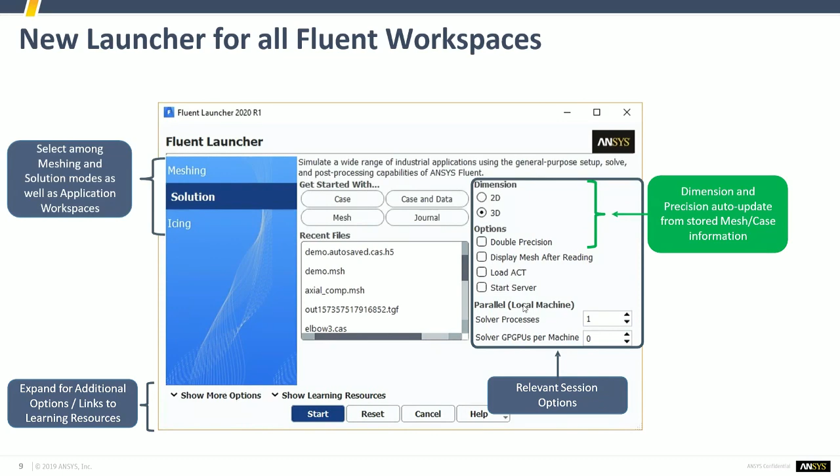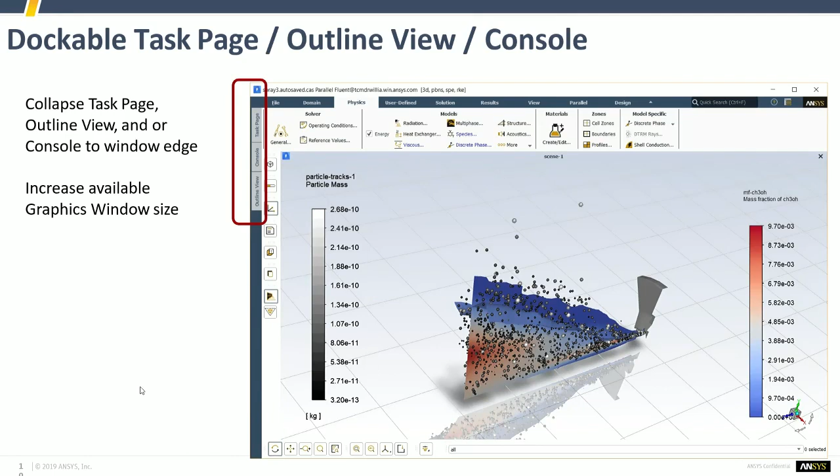The second, probably noticeable and very obvious change is that now the task page, outline view and consoles are dockable. You can collapse them to give the graphics window more space. If you want to visually investigate your problem, or present it, it's basically a bigger graphics window for you to work with, and that gives more advantage to users when they're presenting or looking into models or results.

There are a few new rendering effects. There's reflection, shadows, a ground plane added, and other effects. First of all, it gives the software a new, fresh look, and if you're presenting a result, it's probably more impressive. But you have control over these. If you go to the preferences dialog box and then graphics, you'll notice different options where you can uncheck the reflection, the shadows, and everything. So you have full control over that.

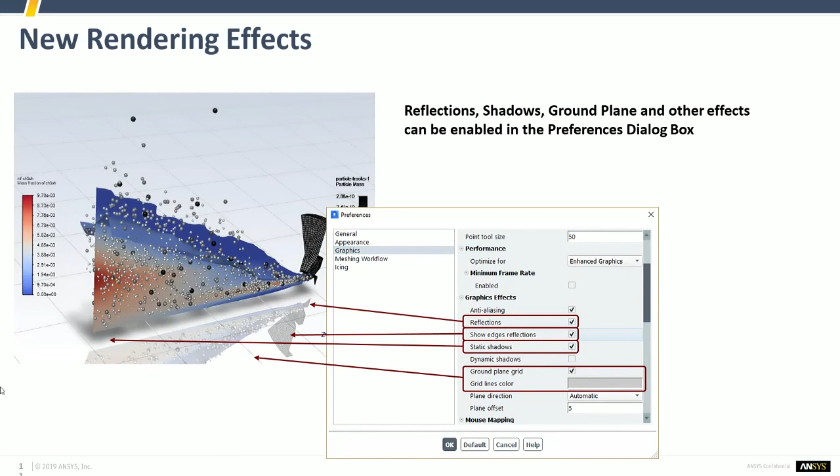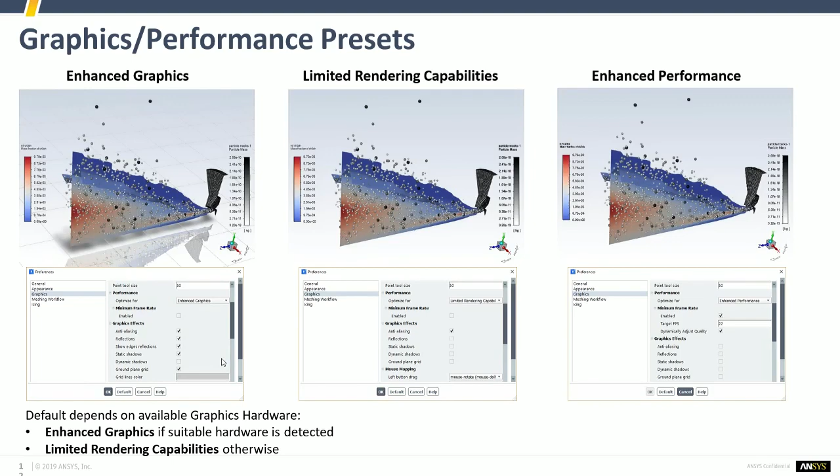Besides that manual control, the software in a smart way detects your available graphics hardware. If you have enough graphics hardware, it will by default switch to enhanced graphics, which includes all those rendering effects I mentioned. If there's not enough graphics hardware available, it will switch to more limited rendering capabilities, or enhanced performance, which limits those new rendering effects so as not to slow down your machine.

There are a few improvements and enhancements in the meshing workflows. For those of you not familiar with the Fluent workflows, they started in late 2018, but the main development was in 2019 when ANSYS introduced meshing workflows. Before, the Fluent meshing task was not necessarily easy. It needed the user to navigate through different windows and have a decent amount of knowledge about the Fluent mesher. So ANSYS introduced these workflows that, without the users necessarily having that knowledge, guide them step by step through the Fluent mesher and help them get decent results.

At each step of these workflows, the software suggests just the meaningful and relevant options to the user, so minimum distraction, and it's really easy to go from top to bottom of these workflows. So I would suggest you try these if you want to use the Fluent mesher. It's really easy to use now. And in 2020 R1, there are some updates and enhancements.

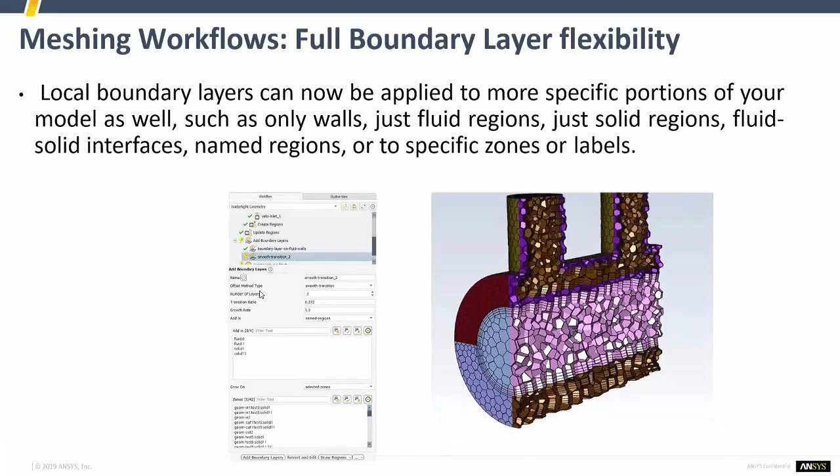And some specific enhancements to the Watertight workflow. Now it handles non-symmetric periodicity, and it stores the location of zones for persistent meshing. If you're a Linux user, there was a bottleneck before, because SpaceClaim right now is not accessible or compatible with Linux, so Linux users had problems importing the SCDM, which is the SpaceClaim format files, into the workflows. Now you can export a PMDB, which is Part Management Database, from SpaceClaim, that is basically used as a workaround for that problem.

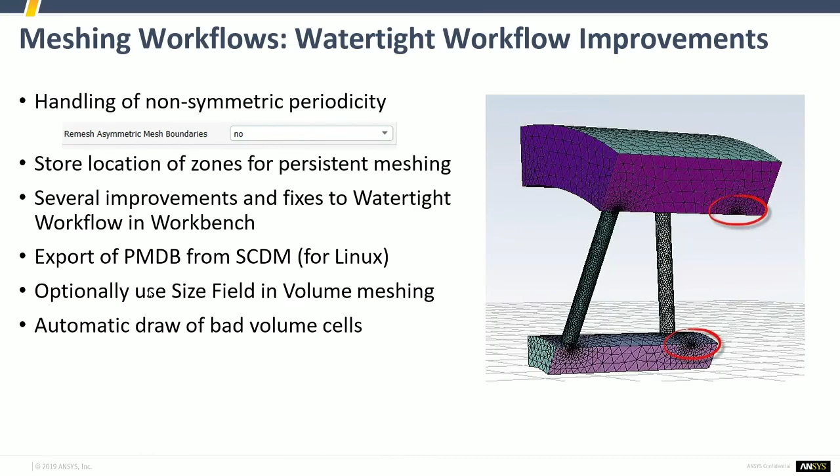You can optionally use a size field in your volume meshing, if you're familiar with that concept, and there's an automatic draw of bad volume cells now in the Watertight meshing workflow. In the other workflow that I mentioned, Fault-Tolerant, which is basically the dirty geometry workflow, there's an enhancement. There's a task introduced to update the boundaries, similar to the Watertight geometry.

And now, in the local refinement region task, there is an offset box that you can create, scaled or offset based on the bounding boxes that you have. These are very useful techniques if you have, for example, external fluid dynamics with vortex shedding, and you want to have different refinement regions to capture those effects.

And also now you can identify the deviated faces, and there's a task for that. Before, if you've used Watertight or Fault-Tolerant meshing with the wrapping technology, you know that the generated mesh might deviate from the actual geometry. Before, you needed to be in the solver environment, not the mesher, the Fluent solver, to check those deviations. Now it's in the meshing environment, so you can check how accurate your mesh is in terms of being on top of your CAD geometry.

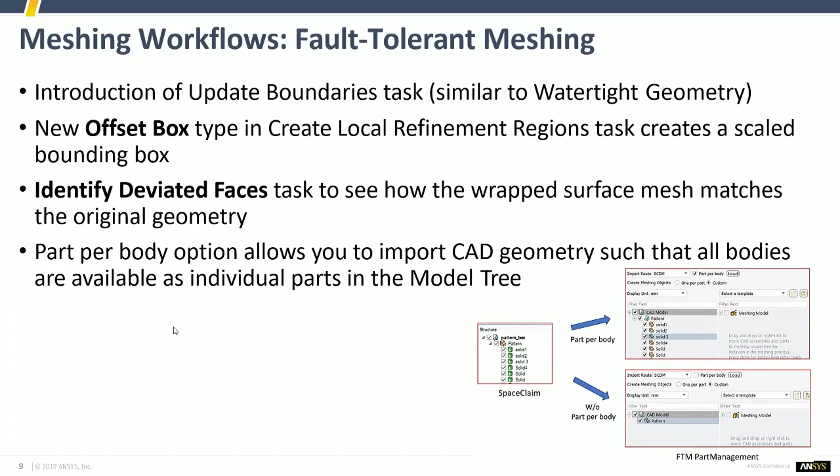Now let's talk about some setup enhancements in 2020 R1. This is very useful. If you've used ANSYS Discovery Live or AIM, it's something that is available there for simpler tools, and now it's available in Fluent. The idea is that you can click on different zones in the graphics window, and there's a quick menu that appears with the most common boundary conditions. So it's really easy to do a quick setup for those boundary conditions, like velocity inlet.

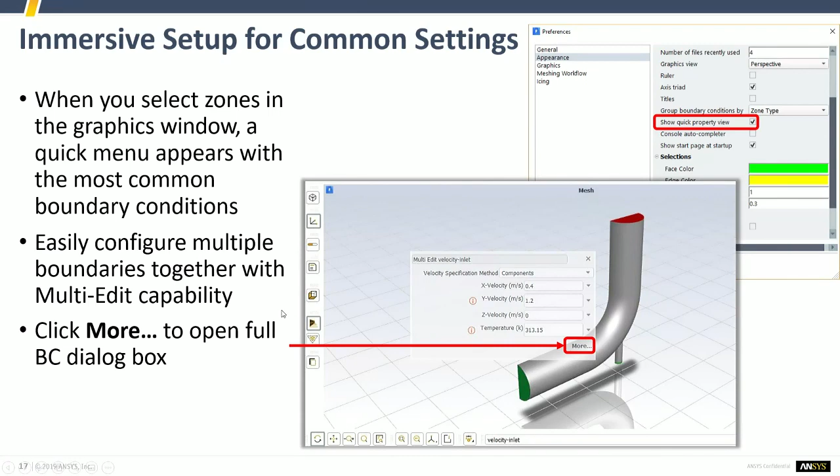Multiple boundary conditions you can set up together. If you click on More, it opens the boundary condition dialog box, as used to be the case before, which users are more familiar with.

There's also an enhancement in the multi-edit boundary or cell zone dialog box. If you remember, in 2019 R3 this was first introduced by ANSYS. You can select different zones from the zone list, and then change their properties altogether, or copy the properties from the master zone and apply them to the rest of the zones you've selected.

There were some bottlenecks before. In 2019 R3, as you can see in the image, if you selected multiple zones, the first zone by order, the top of the list, was considered the master zone, and you were only able to see the properties of that zone or copy those properties to the rest of the list. Now, in 2020 R1, there's a drop-down menu added where you can define what your master zone is.

And this way, you can basically change the master zone. And the second advantage is that you can see the properties of all the items that are selected zones in your list. So it's more control over the multi-edit option that was previously introduced.

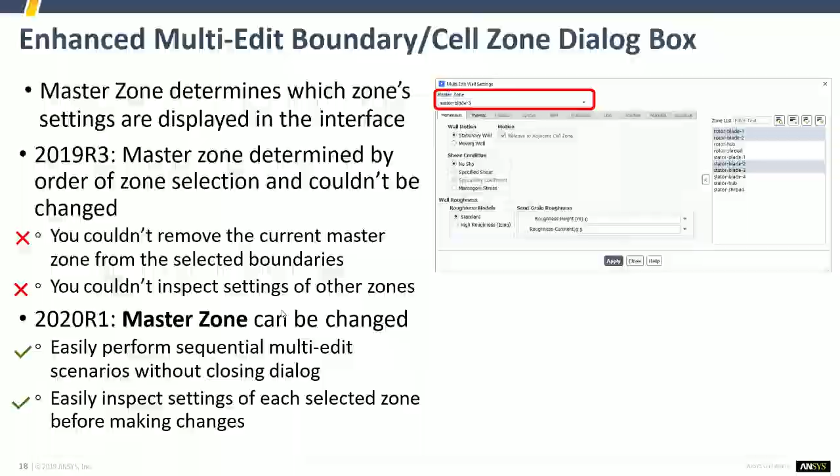In the physics modeling, also there's some enhancement. Probably one of the biggest ones is the turbulence update. If you remember, before in Fluent, the default was a laminar flow in terms of the turbulence model or option. By default it was laminar. Now it's switched to by default the model is K omega SST, and there are two reasons behind it.

One, 99% of the CFD simulations are not laminar. Basically, the actual fluid dynamic problem that you're trying to solve is not laminar. And the second reason is that ANSYS wants users to switch or migrate slowly from K epsilon, which was probably the most common or most preferred option before among the users, to the K omega SST because it's more accurate and more capable in many cases, including the separation.

There are some cases where K epsilon still might be a better option, or few cases I would say. So in general, K omega SST is a better option. And there are some cases that K epsilon might be more stable. There are some ways to basically switch back or use K epsilon in those cases. But it is safe to say that K omega SST is a good option to be a default for the turbulence model.

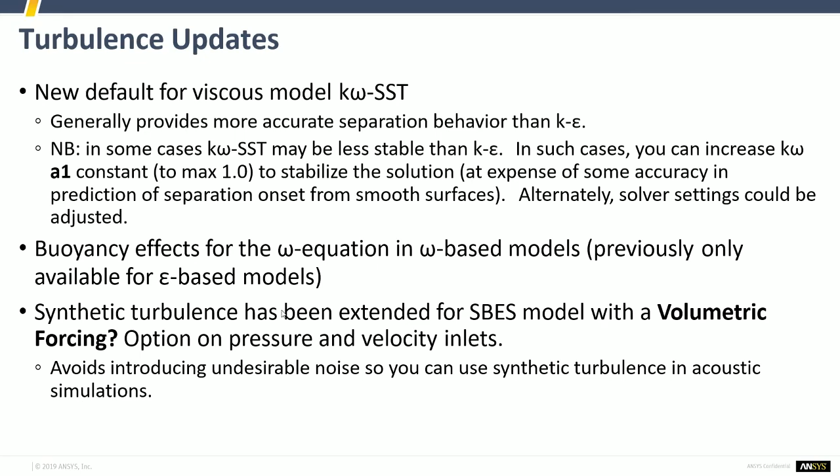Also, the buoyancy effects, which were previously only available in epsilon-based models, are now available in the omega-based models. And synthetic turbulence has been extended for the SBES model with volumetric forcing. The problem before was that if you had acoustic simulations, this synthetic turbulence formulation was applied to the faces, which used to cause some problems, and now they have a volumetric formulation, basically not to generate those issues with acoustic simulations.

In the Eulerian multiphase, there is a workflow consolidation. So before, if you remember, if you had a multiphase problem, you had to set up the whole required inputs in three different dialog boxes and windows. First, at a top level, you had to select from the multiphase model that it's an Eulerian multiphase problem. And then in the phases dialog box, you needed to define the phases, and then the phase interaction needed to be set up in a different window. Interaction means the momentum, mass, and heat exchange.

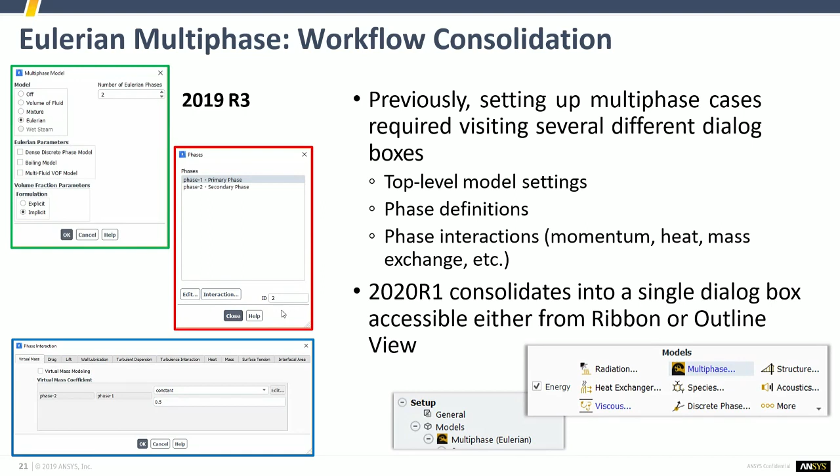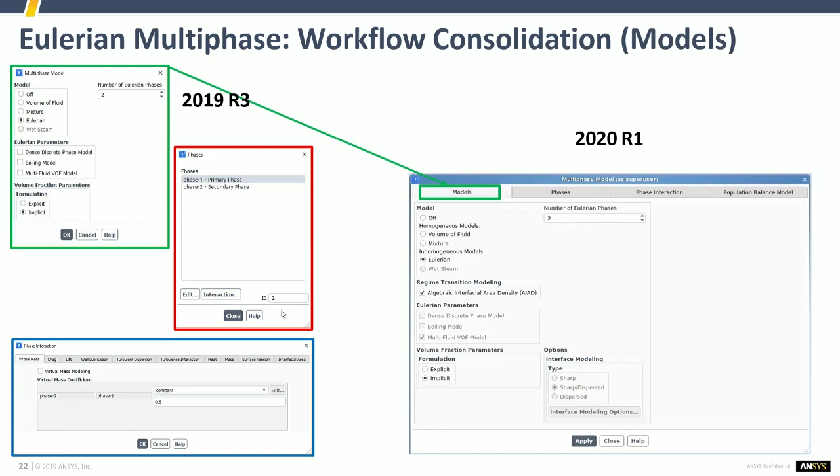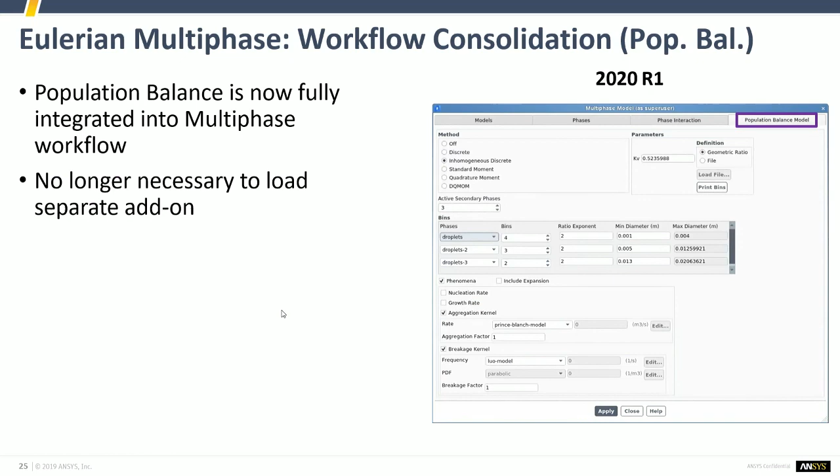Now everything is consolidated in one dialog box in 2020 R1. You can open that dialog box from the ribbon or the outline view, and each of those dialog boxes are now presented in different tabs. You have the model tab, phase tab, and phase interaction tab, and population balance also is now fully integrated in the multiphase workflow, basically if you want to divide them into distinct groups and monitor their behavior.

Volume of fluid, or VOF, has got some enhancement, and this is really a feature I like. Now, if you want to do some mesh adaptation, there are some predefined mesh adaptation controls for volume of fluid and volume of fluid to DPM that automatically set those registers and apply them to the different regions of the domain.

Depending on what you select, if you just select volume of fluid, then those refining and coarsening criteria would be based on just the volume fraction gradients. If you select VOF to DPM generic, it would be just the proximity of the interface. And a more advanced one would be both the proximity of the interface and the cell size threshold inside the secondary phase. If you think of a breakup problem, for example, how big are those droplets and how you want to refine the mesh around those. So it's going to save you a lot of time if you take advantage of these mesh adaptations.

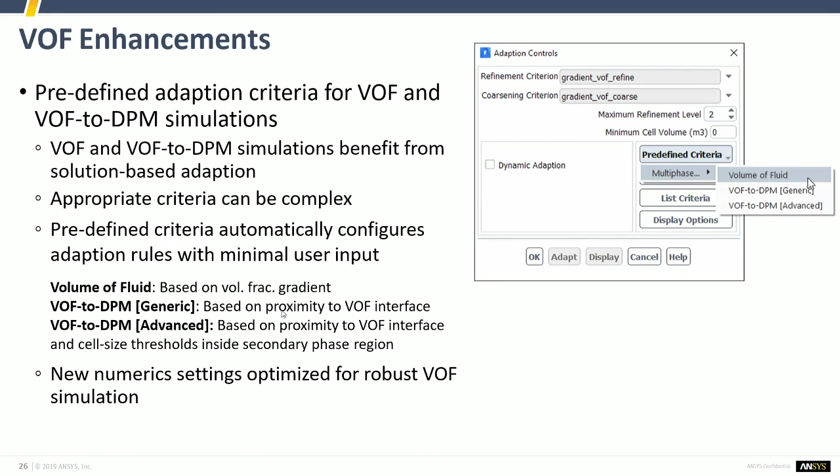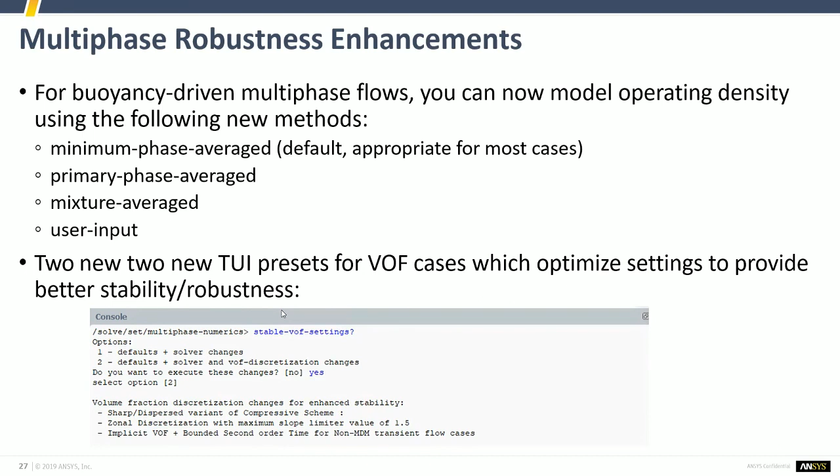Here are some multiphase robustness enhancements. For buoyancy-driven multiphase, now you can model the operating density using new options. Before there was only one option, which was the minimum density of the phases. Now you have that option as default, but you can have primary phase or a mixture average. And also there are two new text commands to preset the volume of fluid cases to optimize the settings for better stability and robustness.

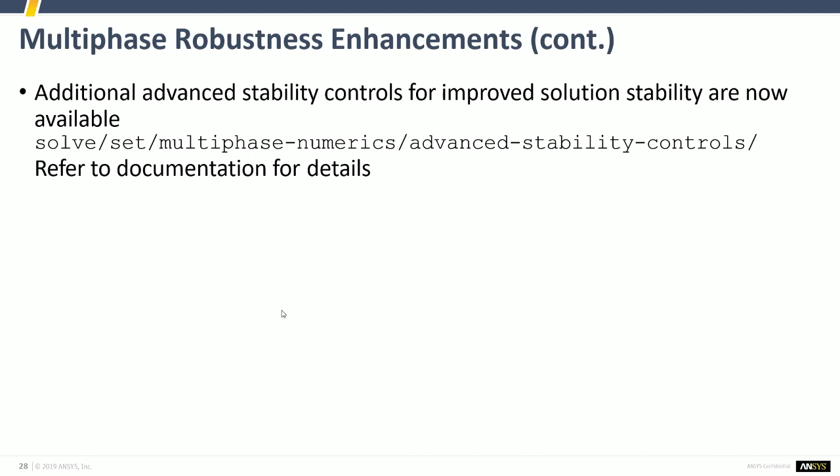And there's another command that you can use for more stability for multi-phase problems, and there's documentation for that in the new release notes.

In the DPM, there's a high resolution tracking method, which is an alternative particle tracking approach for cases where you have small particles, for example, with low relaxation time. This method decomposes the cells into their tet components. They're called subtets, and then it tracks the particles through those subtets, knowing how those subtets are connected to each other, and does continuous interpolation among those subtets.

So it makes it more efficient to track particles in this way, more accurate, and it's compatible with most DPM capabilities. There are some exceptions, like overset mesh is not supported with this method yet.

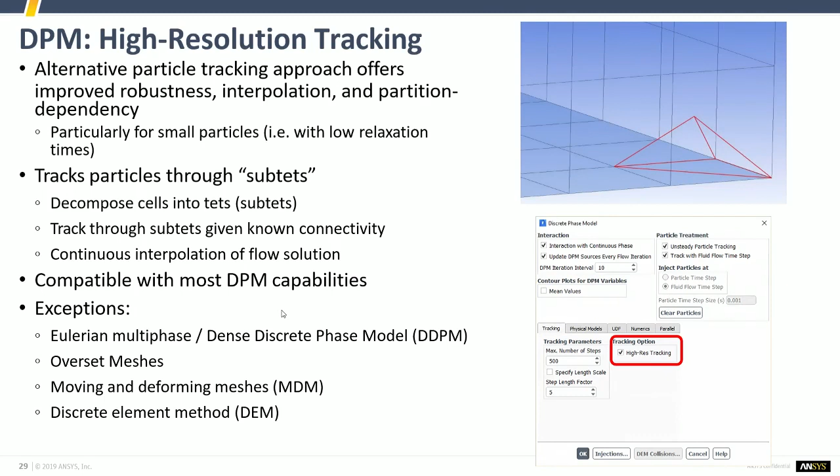And if you have a breakup problem and you're using the Madabhushi breakup model, there are some extensions to that. There's a new column for the drag coefficient parameter, which by default is 1.48, and you can have your UDF function as the drag law, which is something that many advanced users have asked for a long time.

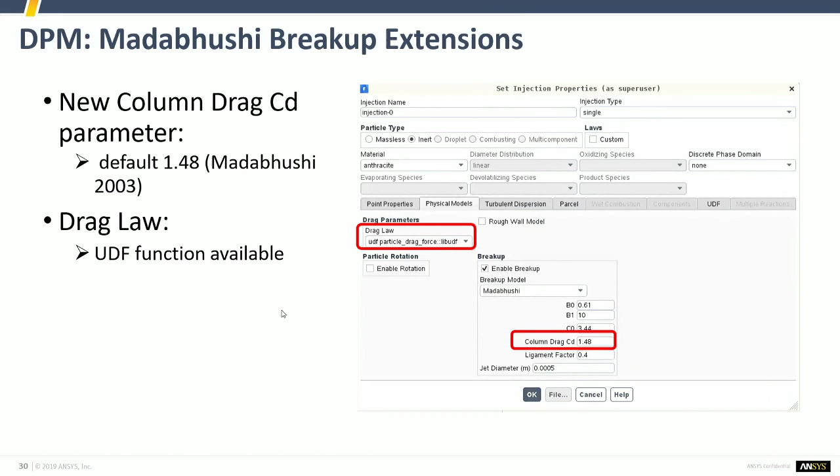If you have Lagrangian wall film, basically representing the wall film with particles, there are some enhancements. You can now initialize the wall film. So in your wall zone settings, as you can see on the right-hand side of the screen, there's a DPM tab associated with that wall. If you check initialize wall film, there are some options to use as your initialization input.

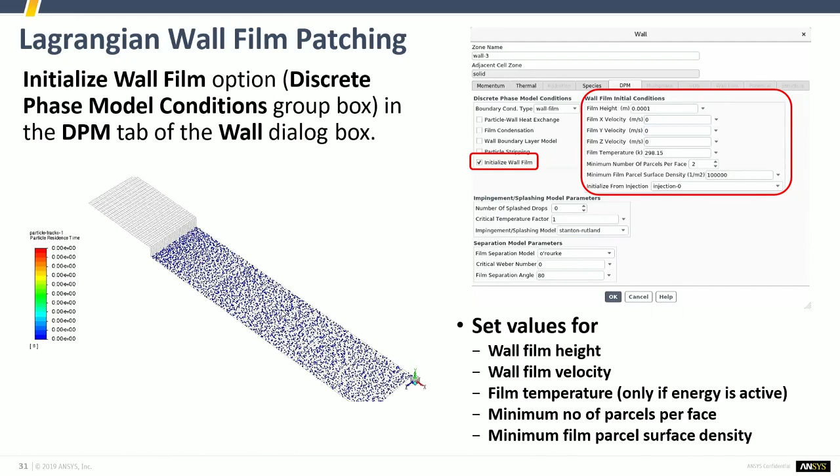It can be a wall film height, wall film velocity, film temperature, minimum number of parcels per face, and minimum film parcel surface density. Minimum number of parcels per face is a very good option if you have a very non-uniform mesh. It will help you distribute the particles representing the wall film.

You can initialize from injection, so it's used to assign injection materials to corresponding physical properties of the film. In addition, you can reset this Lagrangian wall film to 0 from the solution initialization task just by clicking on the reset button. This will delete all the Lagrangian wall film particles as well as zero out the corresponding variables without affecting the free stream particles. So it just affects the particles associated with the wall film, not the whole domain.

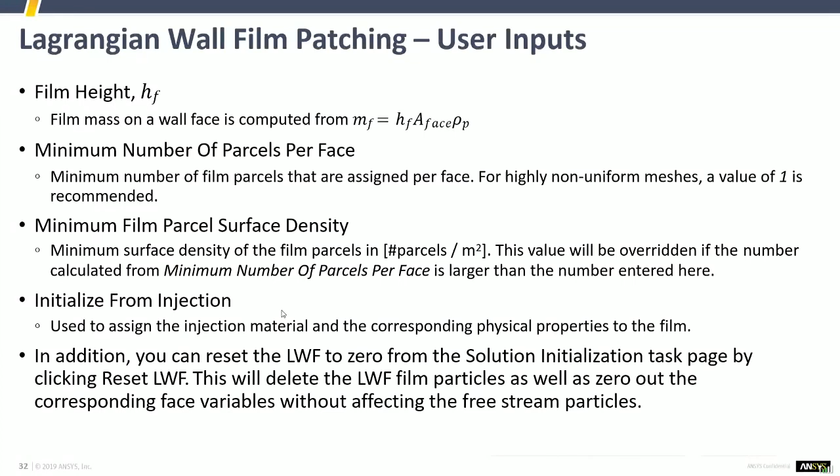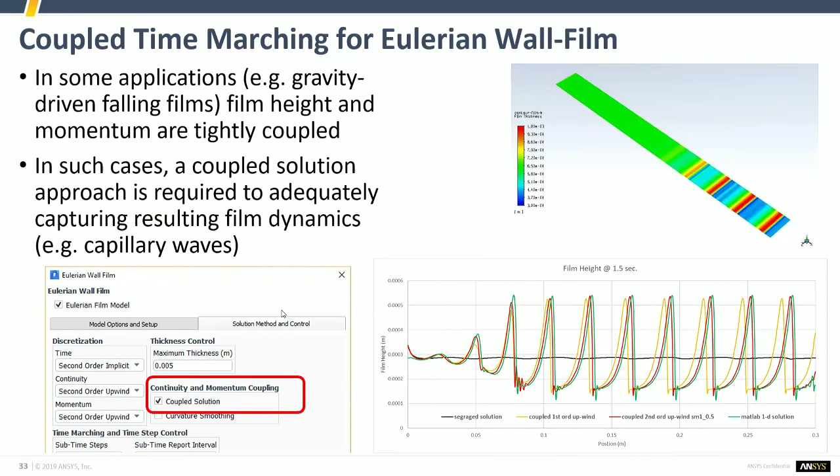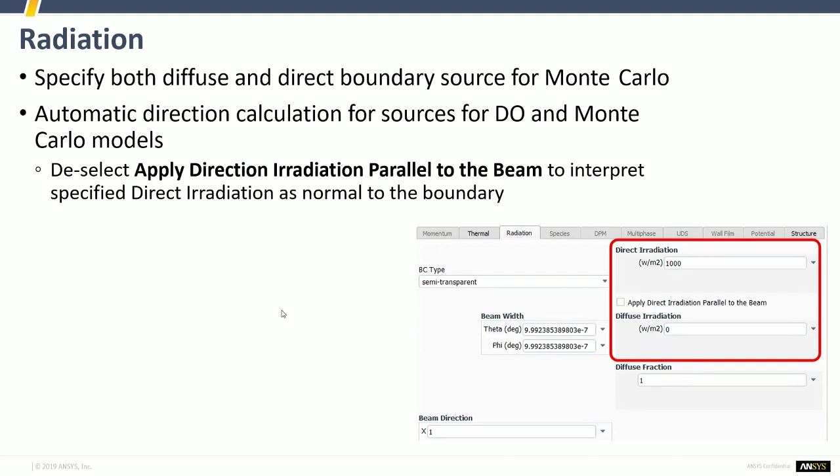Radiation has got some improvements, specifically with Monte Carlo you can now specify both the diffuse and direct boundary source. Before, if you had an irradiation, those values were parallel to the beam. If you had the component normal to the surface, the user had to back calculate the parallel-to-the-beam value, and now it can be done automatically by the software.

In far field acoustics, there's a new Kirchhoff integral for the acoustic wave equation solver, which enables users to use any closed surface as an integral surface. Before it was a bottleneck because those integral surfaces needed to be only zone surfaces. Now it can be any closed surface using this new integral method.

There are some restrictions. Probably the most important one is that this is only an on-the-fly computation, meaning that you cannot save the data and post-process these acoustic properties later. So it's an on-the-fly calculation.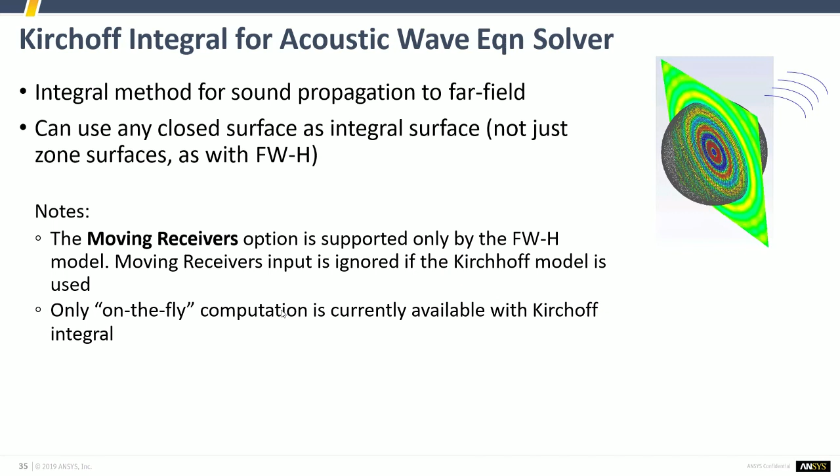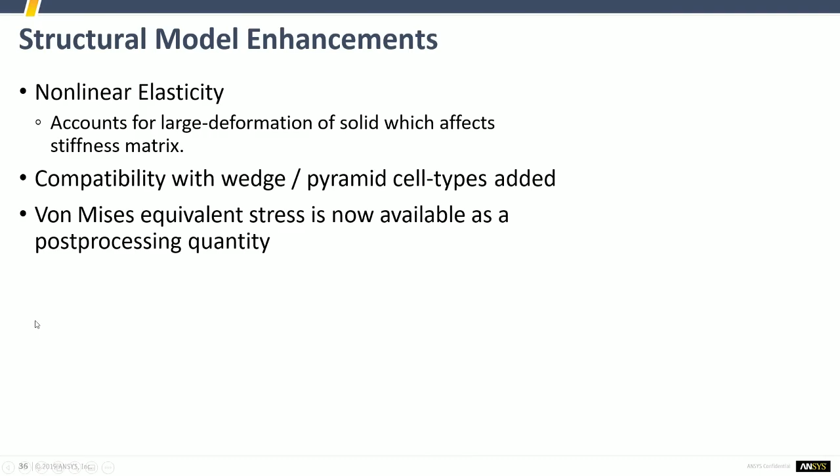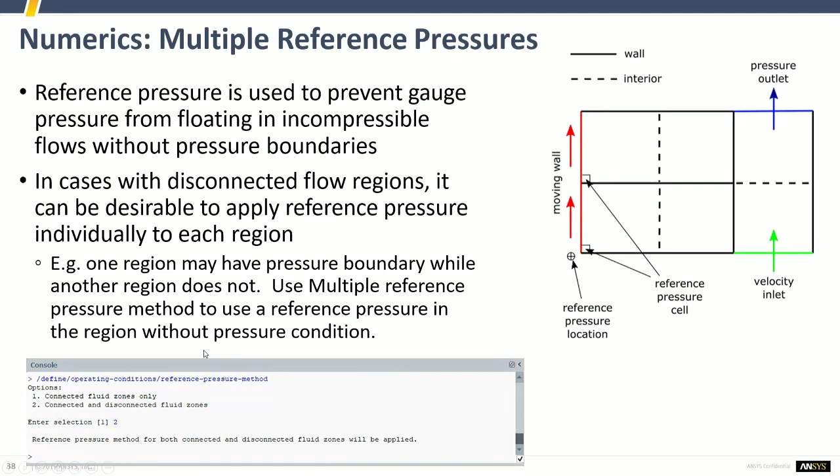Now you can specify reference pressure for those two regions that are bounded with the walls. And the one that has the pressure outlet, as I mentioned, doesn't need any reference pressure because it's going to be overridden by the pressure outlet. But this is a good improvement that you can now have different values for different regions.

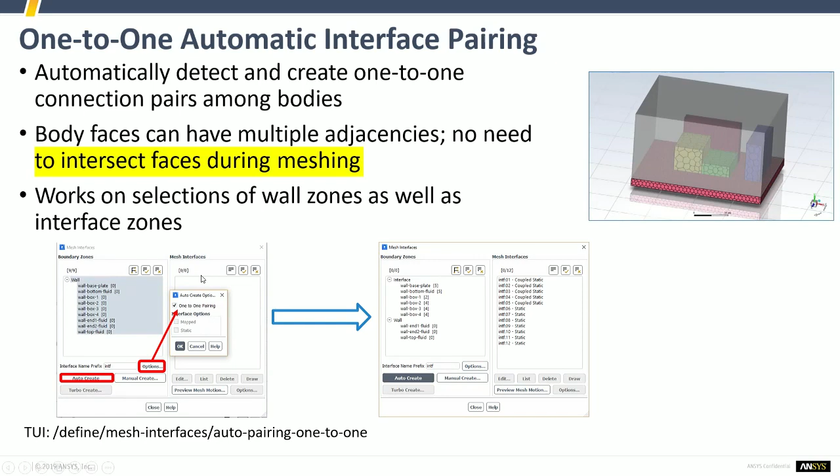So in the boundary zone dialog box, if you click on auto create, and in the options check the 1-to-1 pairing, and then hit auto create, it will create all these boundary zones shown at the bottom of the screen. So it's very easy to detect and define different interfaces.

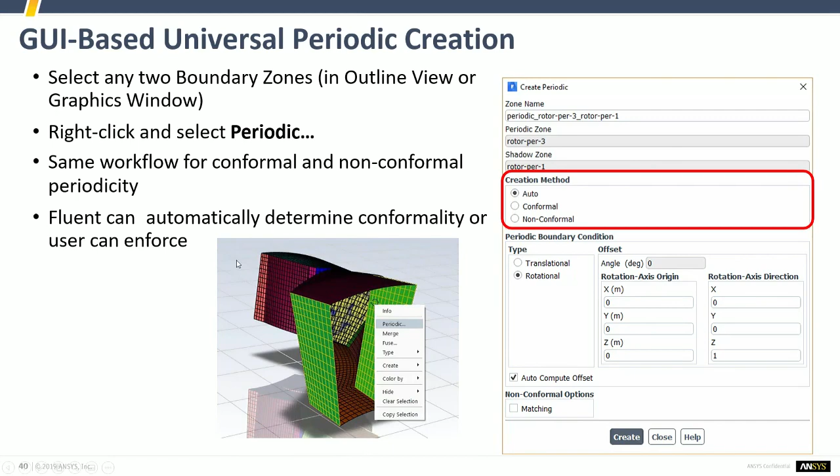There's a GUI-based universal periodic creation. Now you can select any two boundary zones, right-click and say periodic. And it can be conformal or non-conformal. The point is that if you select the auto option, the software would detect in a smart way if they're conformal or non-conformal, and then apply the periodicity boundary condition.

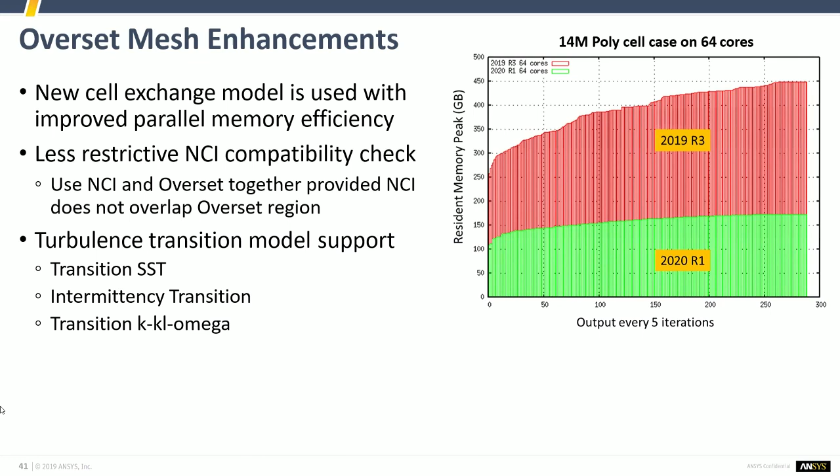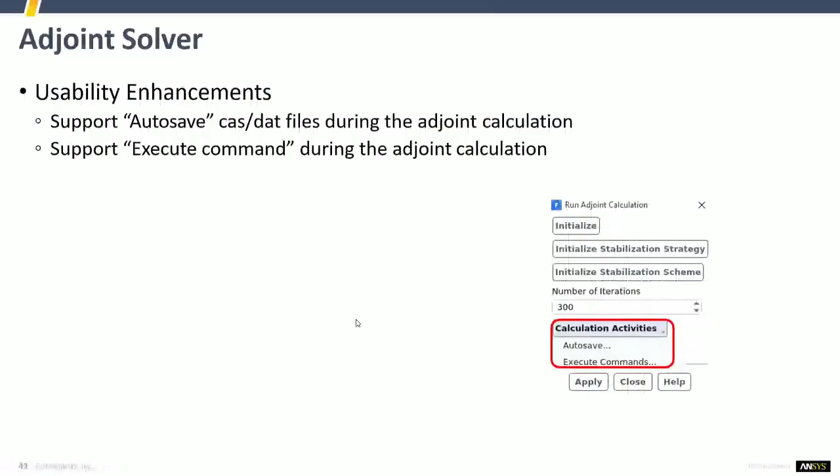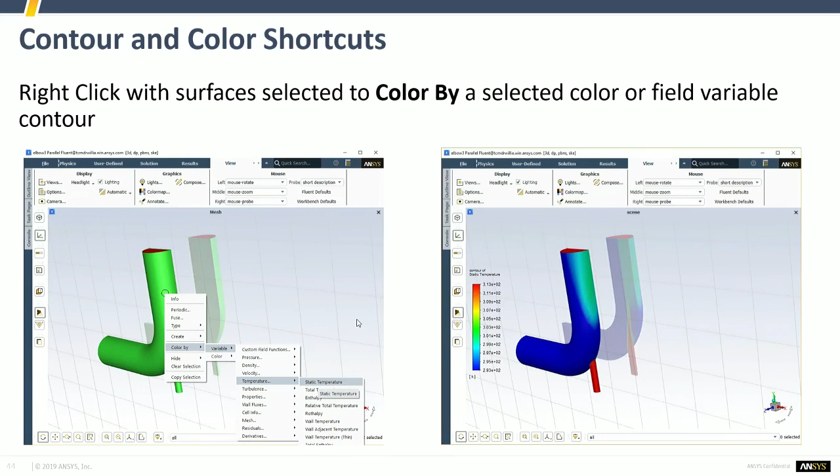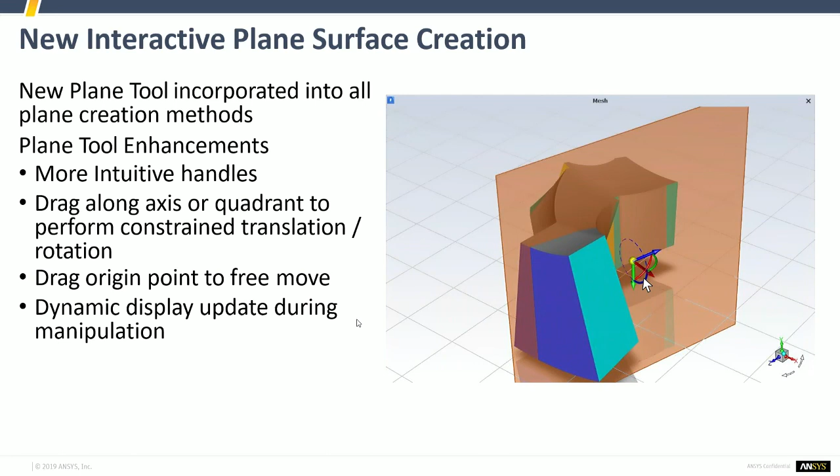The whole plane creation, surface creation has been, I would say, rebuilt or remodeled in the 2020 R1. It's now basically a new plane tool, and you can easily play with it. You can drag the plane that you've created along the different axes, or drag it to the origin. And there's a dynamic display updating during all these manipulations.

Different methods to create these plane surfaces are consolidated into one dialog box. Still, you have the XYZ plane method or point and normal method. In the 3-point method, there are bounded and sample points options. If you select bounded, the surface bounds are defined by the specific points rather than just the domain extension, and you will see that in the picture in the next slide.

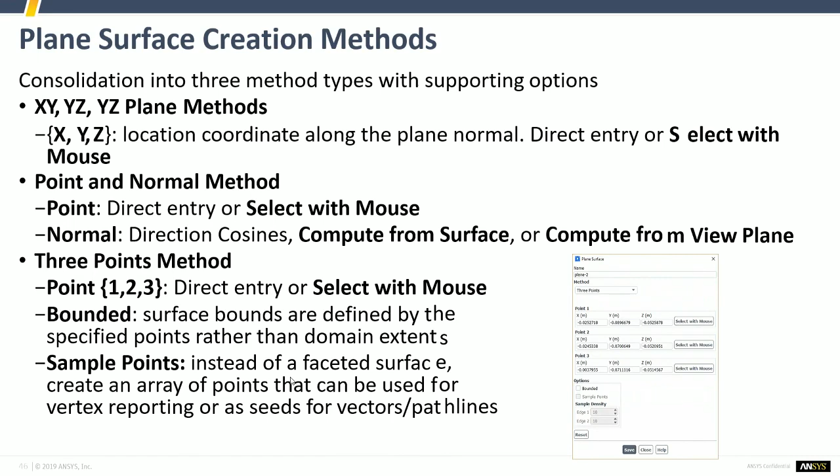And if you select sample points, instead of faceted surfaces, you can create an array of the points. So that's what I was talking about. This option on the top right represents the bounded option. If you switch it on and off, you will see the effect how it's bounded, not by the domain.

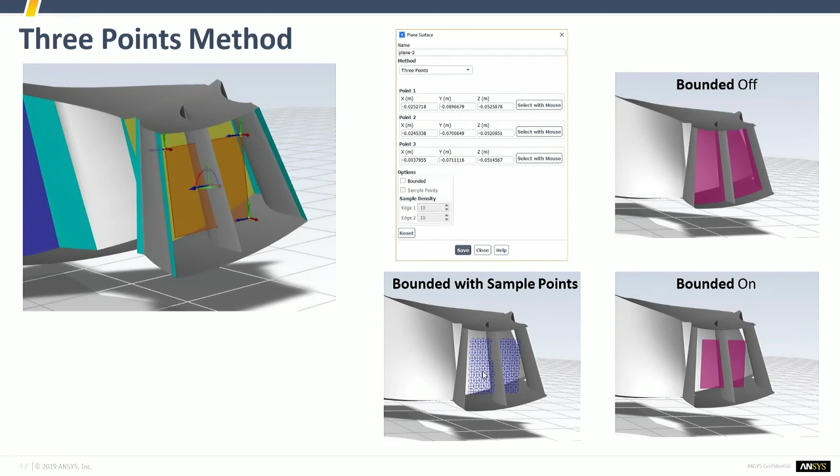So on the left, the user selected 3 points, as you can see on the orange plane on the top left. If you turn bounded on, this plane would be bounded by those 3 points. And if you turn it off, this plane would be bounded by the actual geometry. And the middle of the screen shows those sample points that I mentioned. Instead of using faceted surfaces, it just uses an array of the points.

There's also a new point tool, same as plane. It's got some new features. You can just easily drag it along the surfaces, or just free drag in any direction that you want.

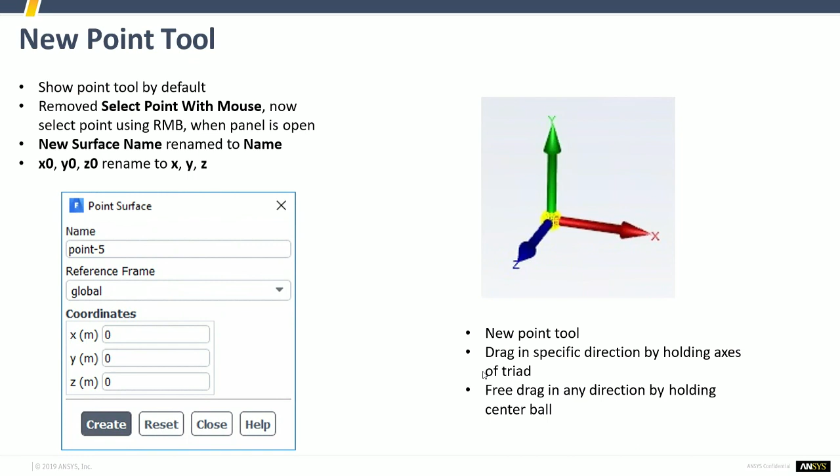There are 2 new plot types. One is called data sources, which combines different data from the solution that you have. It can be XY plots, report plots, or any external data file. It combines all of them together and represents them in multi-column data and files with multiple data sections. So a consolidation or combination of different plots in one source.

This is something that is really... plot, and this is something especially the aerospace or aerodynamic guys always ask for. This example shows the whole thing. If, for example, you have an airfoil and you're going from the leading to the trailing edge along that line, you can plot the cumulative force or moment data along this specific axis or line. So it acts as an integral function as you move along any specific line or axis.

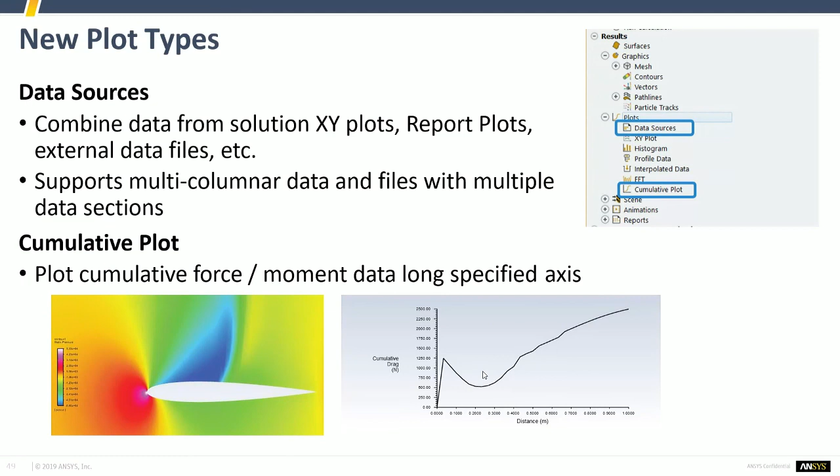Some migration considerations. Probably the most important one is the cut cell remeshing method with dynamic mesh is not available anymore. And if you're a Linux user, RSH is no longer available for spawning remote Linux nodes due to security issues, and the secure one is the SSH method. The tpoly utility is also removed. If you've used that before, there are some alternatives. You can look into it if you're interested. There's some documentation on this as well.

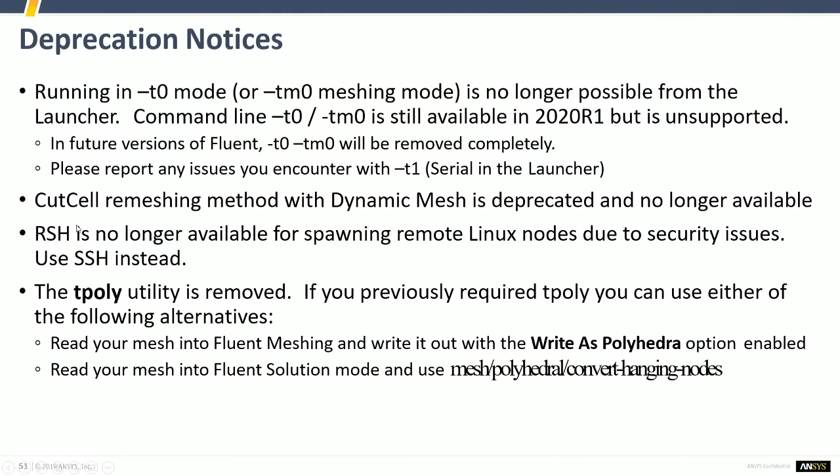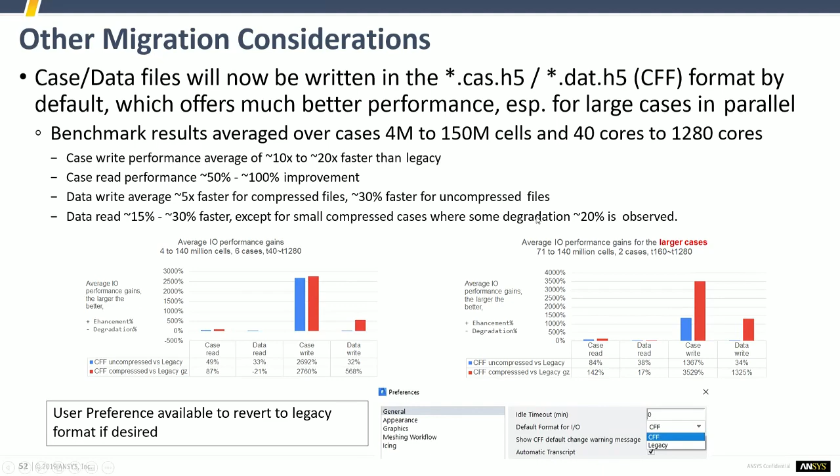And this is probably one of the important migration considerations: the case and data files are now written in the H5 format, which is a more compact and efficient format. They're called CFF, Common Fluids Format, by ANSYS. And they behave really well, especially in parallel. There's still an option if the user prefers the legacy format. In the preferences dialog box, you can switch between CFF or legacy, as you can see on the bottom of the screen. But again, it's highly efficient, so I would recommend it.

We talked about the change in the viscous model. The default is no longer laminar, it's k-omega SST. And the polyhedral unstructured mesh adaptation, called PUMA, is now used by default in 3D cases.

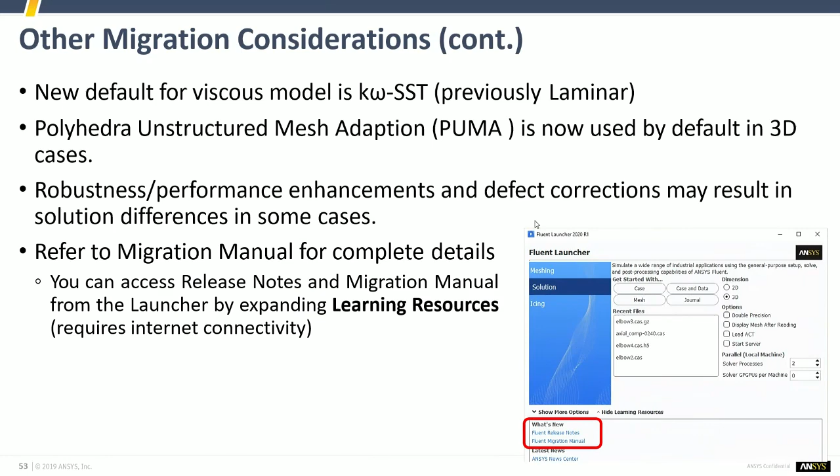When you launch Fluent, in the launcher window there is a section called What's New. You can refer to the migration manual there, release notes, and lots of learning resources. So I recommend you take a look at that. So with that, I'm going to conclude this Fluent 2020 R1 update.